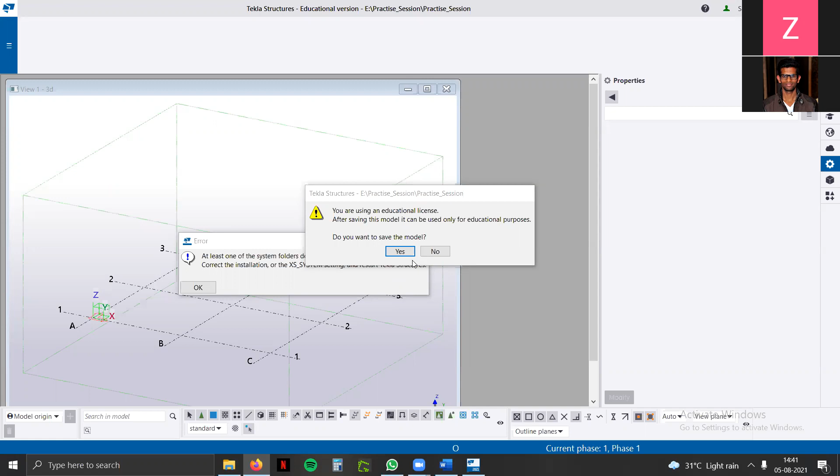I'll click yes to save this model, and I'll ignore this error for now. So we are into the software right now. It's popping up Trimble Connect - I'll talk about that later, what Trimble Connect is. So this is the interface of Tekla Structures, how it looks like.

We'll talk about the features and functions one by one with the software, starting from the file menu - the three lines icon represents the file menu. Here we generally provide input regarding setting up units, project properties, location of the project, and whichever information we want incorporated in our drawings. From 'New', once you've started with a model, if you don't want to open Tekla again and want to start a new model, you can directly press New to create a new model without opening it up again.

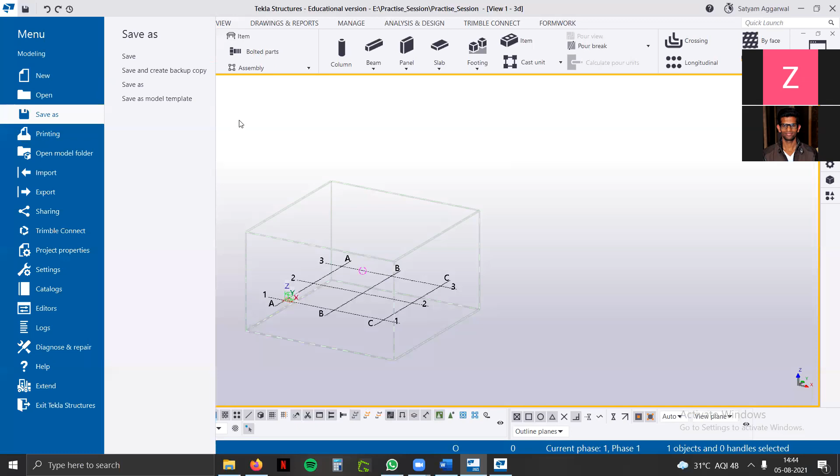Okay Satyam, just a second. There's a hand raised by Aftab, sir. Yes, sir, just hello. Yes, Aftab sir, yes.

Actually, I have downloaded this software which you gave the introduction to, Tekla Structures, but all these icons are not shown to me - in my software the icons are different from yours. Did you download the education version? Yes, I have downloaded the Tekla Structural Designer trial. Is it the same? No sir, actually I asked for Tekla Structures 2021, not the designer one, it is the modeling one.

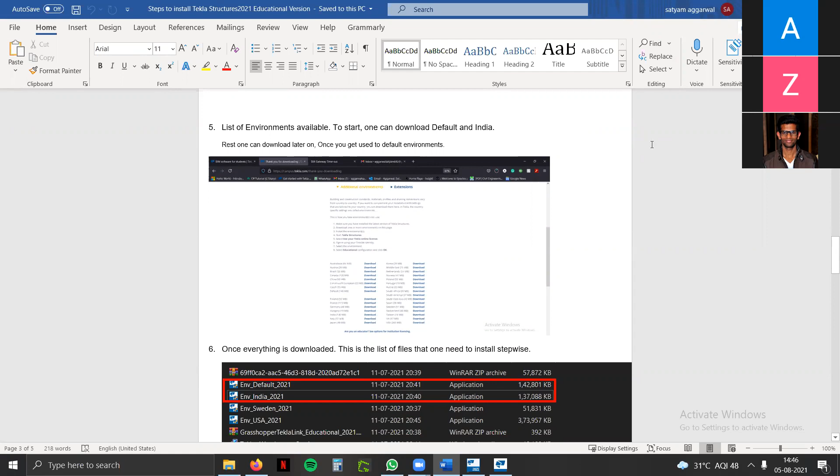Is there any option so I can be on the same screen as you are showing us? I think you have to download it again from the website - I have shared the steps as well. If you feel any issue, I can help you out, you can share your screen afterwards. So Tekla Structural Designer is another one, Tekla Structures is another one, and Tekla Tedds is another one - as discussed previously, Tekla has branches, and under that branch three softwares come: Tedds, Structural Designer, and Structures. We are having the session on Tekla Structures for now.

Satyam, what is the basic - there's a question that comes, sorry to interrupt you again. There's a question coming about what is the basic difference between the Structures and Structural Designer software, as you said there are three branches, so what is the difference between these two?

Hello, Satyam, am I audible? I think Satyam lost his connection. I think so ma'am, I'm just connected. Yes, I think he just left the meeting, I just had a word with him. I think there was some internet issue. Okay it's fine, can you just answer that and then we can proceed? Yeah, I'll answer, I'll share my screen and answer.

So you can see the interface, we have different tabs: steel, concrete, rebar, drawings and reports, manage, analysis, and design. In Tekla Structures, what we do is model the building according to its nature, whether it is a concrete or steel type building, and after that we extract the drawing or production-ready files which directly go to the shop drawing factory where they will be casted - it is compatible to that.

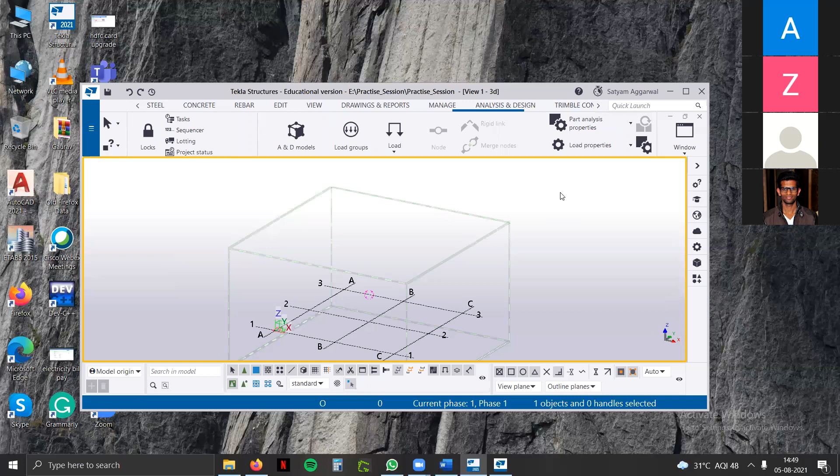Okay, I hope Satyam - yes yes, I think it's fine, you continue and then we'll see if we have any queries and take them up at the end of the session. Sure, okay.

So over here we have printing - we can print drawings and reports. Reports is for extracting what type of bars we have, the schedule for bars and everything. Print drawings lets us print the elevation plan and shop drawings from this command. You can see the interface, we can do the printer settings, either in file or PDF - we can directly make that model and convert that drawing to PDF format to send directly to the factory or to the contractor who wants to use it.

So we have different options as well, what type of nature we want to have for extraction, like document manager. Then we have the model folder, open model folder. So in starting, we have generated one folder for that model. So over here we have loaded the model folder.

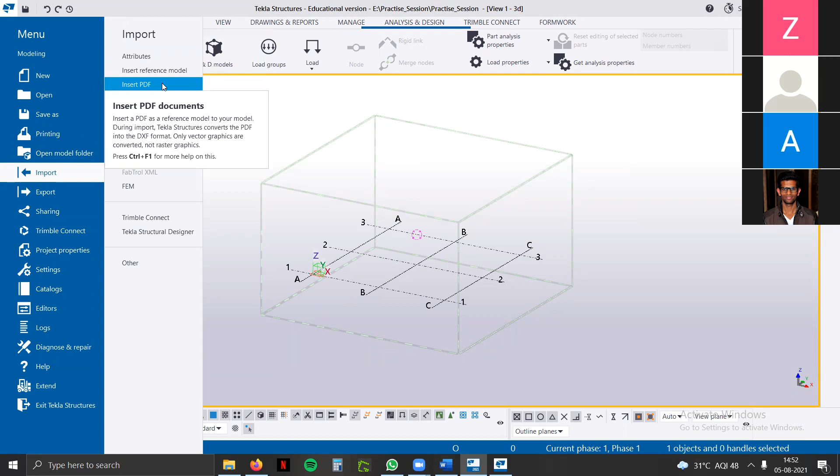Then we have types of files we can import. We generally use CAD models if you have, and DWG files and DXF files, whatever format we have, whether it is DWG or DXF, we used to import that. And if we have any PDF, we can directly insert that. We used to have insert reference model, like I have shown previously in my presentation. We have MEP model, how we coordinate is like reference model is a very good tool to add that. So we add from here, and we can see how it looks like.

Okay, and export IFC is a very good function. I have we have discussed about it. IFC, industry foundation class. So what basically IFC does, whatever we use to model in this area, this will be exported, and obviously we won't be sharing all of the model to the owner or contractor or whom the person is concerned. We will share in some simple format so that it can be visible to everyone. So IFC helps us to convert into a simpler format.

Like DWG and CAD is for drawings, like we can't share all of the software to the person. We need some specified file format to make it readable, human readable. So we'll use IFC for that, for the model.

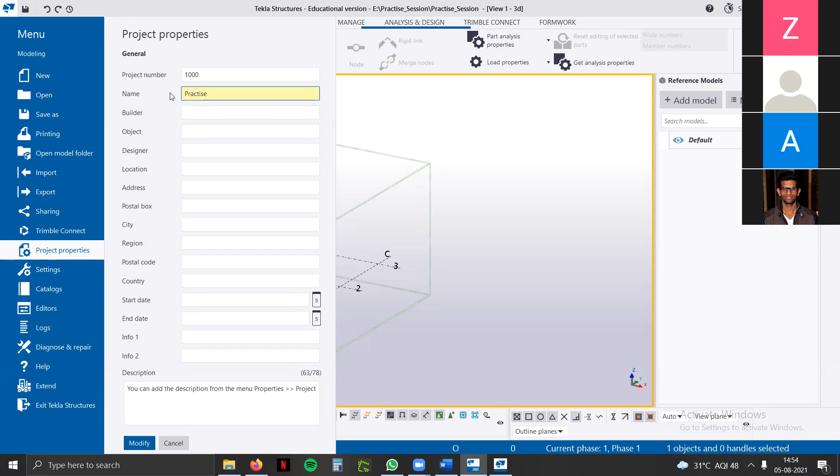As I was talking about project properties, while starting a project, we will assign some number like 1000. It is the name of the project. So I'll name it as practice builder. I'll leave it, object, region in which the project is located, city, whatever fields you have, whatever data you have, you can put it over here, and it will be directly helpful in generating the drawing.

If the designer wants some specific set of information in the drawing, what we use to send to the contractor, we can describe it over here what we have. And after filling all that important information, we need to have that location.

Like on the real-time coordinates, do we want to start that project, or can we start from origin axis? If we have northeast coordinates, like from total station, we generally have coordinates of the building, the specification of the building, where it is located. So we'll provide that northeast coordinates, elevation, latitude, longitude, all those dimensions. Otherwise, we can start from the origin 0,0 axis, skip that part and start from the origin axis. So these are the basic project properties we want to have, and we can start with that thing.

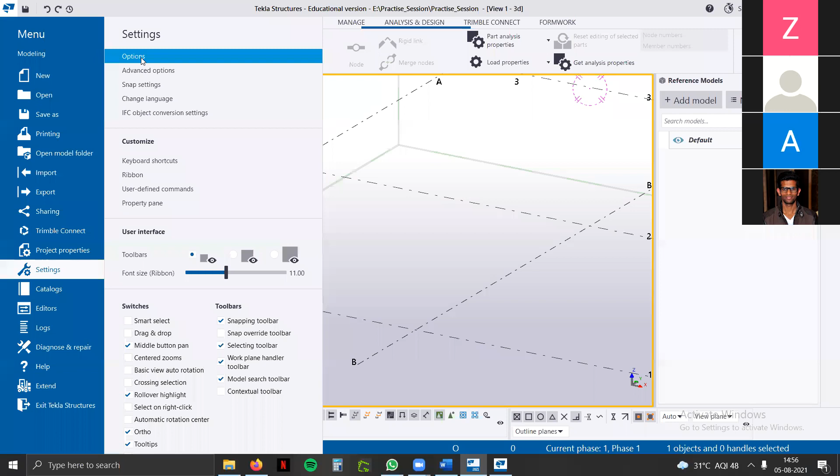Next is settings. If we want to modify something, let me show you an example. This area is called work area. The box you are seeing is a boundary of the area in which you will work. If the person needs to start modeling, they should have some boundaries, some specified area of work.

So this is called the work area of the model, and this is grid lines on which our drawings are based. We start modeling like where our footing will be, and whether it is eccentric to the grid, or on the center of the grid. So these we can all manipulate, we can make a change as per our drawing specification.

And as I have clicked upon this boundary box, we have different information like name. We can see it is a 3D model, so name is specified as 3D. Angle is mentioned as 3D. We can change if we want plane, 2D plane, or if we need 3D plane. We have projection, orthogonal or perspective.

Perspective is like it will diminish while going behind, and orthogonal will be the same from all around, keeping same. Obviously it won't be visible for now, I'll show when we start modeling, we can see the difference. And visibility depth, like how much height should be above it and how much below, that is there. So these are basically the default settings for now.

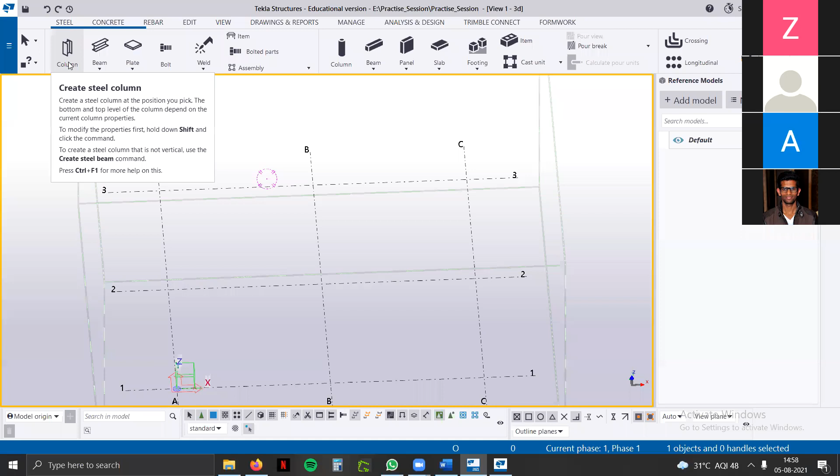In this ribbon area on the top, which we have by default, we have steel as an option. We can start with a steel column, beam, plates, bolts to connect them, or weld to connect the two steel parts, and items if we have specified items in the project. So this section covers steel.

Next is, if we have a concrete building, we need concrete elements to be there: concrete column, beam, wall, slab, and footing - we have everything. And item, if there is anything not specified, or we want a different concrete item which is not like the regular ones, we can put it in there.

Edit, if we want to see some changes, like if we want a cut in the beam, column, or slab, we use the fit part option. We generally use it in steel to fit it up. Chamfer - we generally see slabs made chamfered, we do that at the edges.

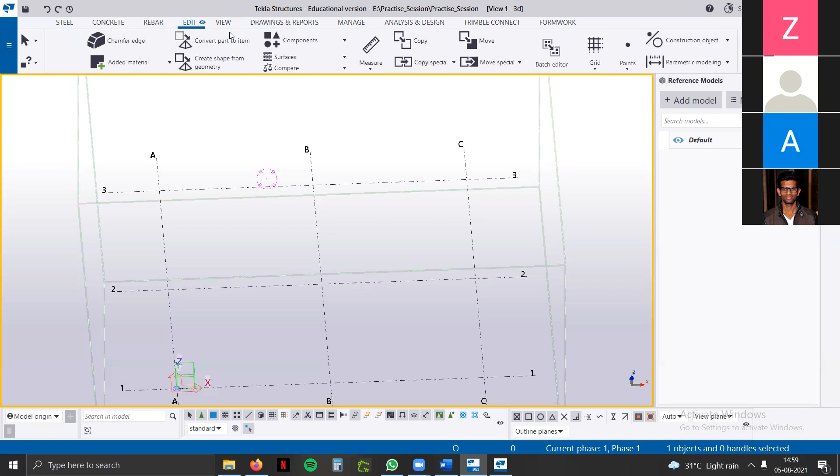After edit, I'll move towards measure. If we want to measure, say from one point to another point distance, we'll pick one point with the left click of the mouse and terminate it at another point. Then we can terminate it by clicking again on the left mouse button. So this is the measurement tool.

Copy - if you want to copy one object from one space to another, we have a different range of options for that. And move.

As I've talked to you about the work area, this covers the work area. This is the default view, but we can select and alter it as per our requirement. If we want to shorten it up, we use this option using 2 points. So we pick - like this, we can't see anything, because we have shortened it up.

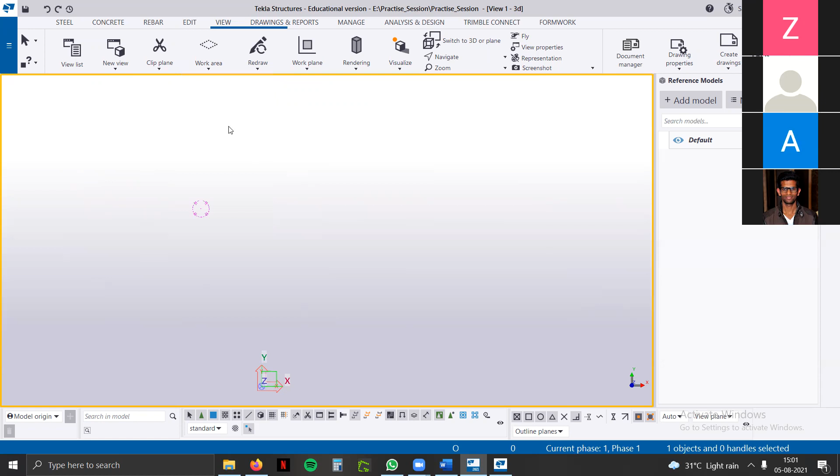But to bring it back again, we'll select this - we'll use this to fit the entire model in all views. So it will bring back the entire model in the window.

If we want to make it shorter, we just pick and drag to the location we want to see again. We have just a basic closer look of that. In this particular area, whenever we open a model, it will show only this amount of area - the elements attached to this view will be visible. So I'll bring it back to the full view because we need the entire model.

So these are the basic tools, the basic command list which are there. The ribbon is full of many commands. As we get used to with this software, we'll learn how to tackle all these commands. We'll try to cover these commands one by one.

So I will start modeling one footing. I'll pick up a footing. Before footing, we can see the grid, but after the work area, we will model that footing on the grid.

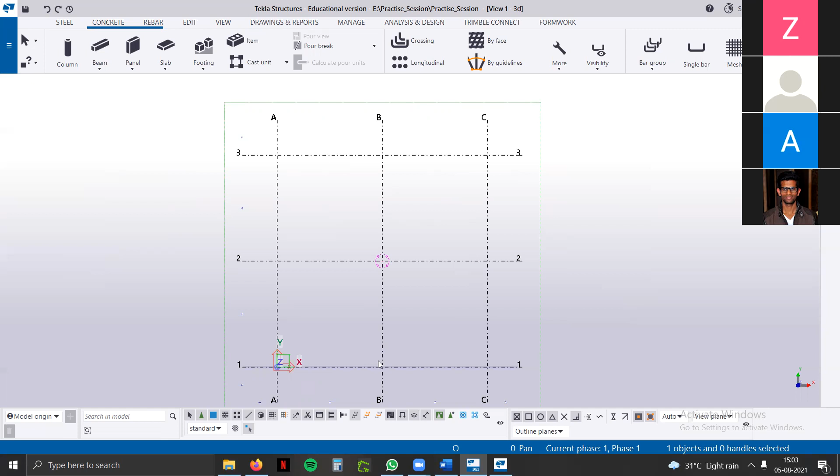Grid is a very important part in any project. The designer or the person will see how the geometry is and how they need to divide the building. So they will plan some grid system, a grid coordinate system in that project. After setting up that grid space, obviously this default grid won't be used.

We just press double click on that, and rectangular grid is an option available here. If we want a different type of grid, we can use that as well. We can simply go to the grid option in edit - we can create a radial grid, create a rectangular grid, or add a grid line if we want. So we'll be choosing the rectangular grid option for now - this is rectangular grid.

So if we double click, we have this rectangular grid option. Now we don't want this default grid to be there. If we want to modify it, how will we do it? So default is like if we measure 6,000 cross 6,000, but we want somewhere 3,000, somewhere 4,500, somewhere 5,500.

We'll pick up this grid. Firstly, origin is 0,0. So we have 0, and after entering another coordinate, we have to provide a space over there so that it picks up another coordinate. Without space, it won't pick up another value. So it works accordingly, like a tab or space, you can say.

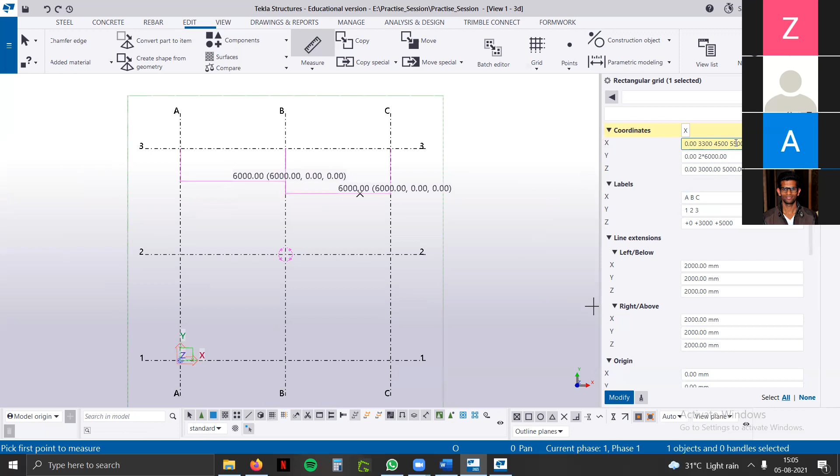So to add another dimension, we'll set it up on 3,300, and another I'll pick it on 4,500. Just providing the space to separate it, and 5,500. So you can see I have taken up 1, 2, 3, and 4 grid lines. Over there are 3, so now you can see the difference.

So we have 4 grid lines over there. We have made a change over there. On origin, we have A grid. Then on 3,300, we can relate it to B, because labels are also mentioned over here. These are the default labels. We can alter it, like we have made a change in the coordinates. So over B, and then third coordinate is C, and then we have another grid line which is not labeled.

We are seeing just a blank, we are not seeing any label on that. We have to name it. So we have added one grid line, we'll make it D. So we have 4 grid lines over there.

So it works on the axis. We are on the plane right now. There are three axes in the software: x-axis, y-axis, and z-axis, which is out of the plane. That helps us create levels of the building, the z-axis.

So we have made a change in the x-axis coordinate, like these are the vertical grid lines. So along the grid axis, they have made a change. So on the y-axis, we have three grid lines again, which are on the default side, at 6,000, 6,000 each. So we'll make a change over there again.

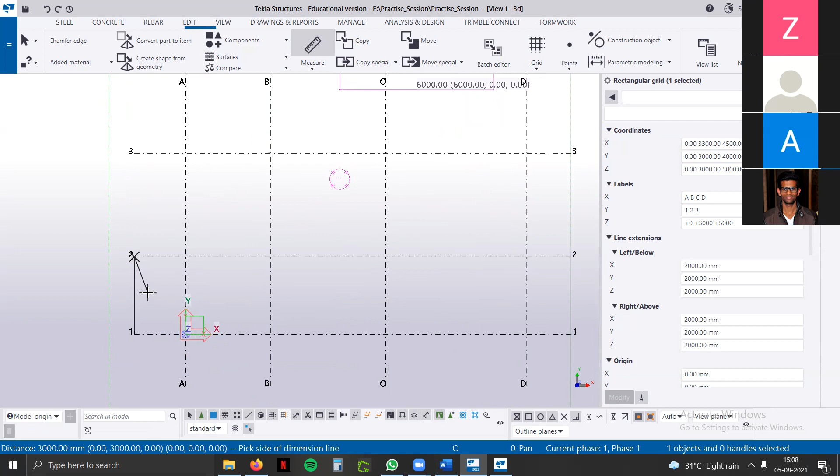So let us check whether the dimension we have provided is correct or not. Again, from the measure tool, you can pick it up, endpoint 1, endpoint 2, and then anywhere in the space you can press the left click of the mouse: 3,000. Again we can check by measuring it: 4,000, and again this.

So as you can see, we have made a change, and this is parallelly displaying the results. That is the power of this software and BIM. We need not change anything in any drawing—since we have not made any drawing—but it will be parallelly reflected to the drawing as well, and we'll label it up also.

So we are seeing a coordinate grid system over there, a rectangular grid system. Now we have talked about x and y axis. What if we want to add planes in that? We want to have different sets of levels, because a building will obviously have some stories, multi-story, whether it is G plus 1, 2, 3, any of it. If there is a basement, we also provide it. So I'll talk about ground and plus 2, 3 coordinates.

So we'll add some planes over there. I'll take the height of the building as 3,000 first, and over there—yeah, I missed that thing. So in the coordinates, I need to make a change, not in the labels first, so that I can see 9,000. So on the zero axis, that is the ground floor; we consider the first, second, and third floor. Accordingly, we can make a change over there: 6,000, 9,000.

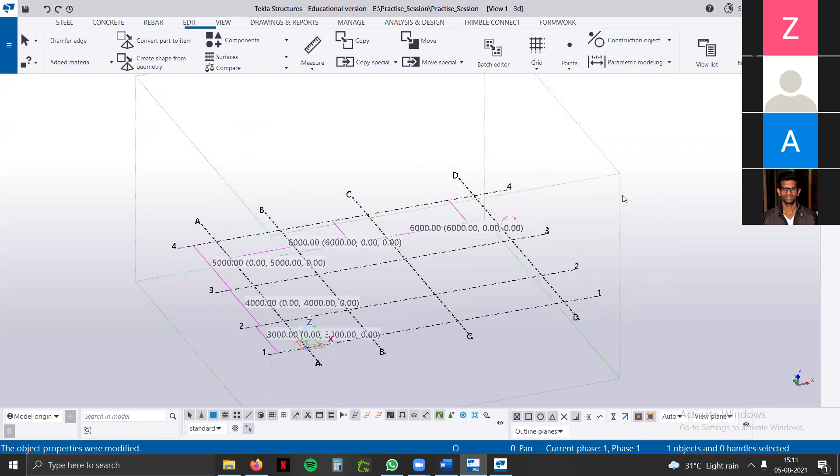So will we create... Hello. Yes, yes, Satyam, continue.

Yes, it has some great feature like in the view as well. We can create views along the grid lines. So in this tab, we can see from where, which location of the plane we want to have coordinates, we want to have views.

Like we have seen in the presentation, we generate a model and we can see the view from everywhere of the building. So this is setting it up, doing the settings and some tweaks before entering into the modeling. So X, Y, Z, XZ, which part of the grid system or coordinates we want to see, which axis you want to see.

And if there is a radial grid, we can do that changes. Since we have rectangular grid for now, we'll use this and create. So previously it was empty, now we have got a list of views over there. Now it is bit relatable, like whatever grid we have created, we have got the views for that. We'll look into it like how it is there.

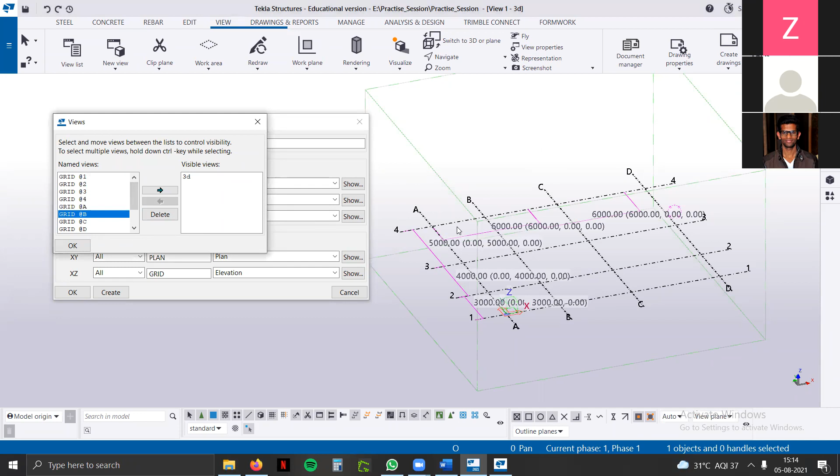So let us pick a view over here, there from we can check. I'll take inside of the grid a view. So we have created levels 0, 3000, 6000, 9000 - ground floor, first floor, second floor, and third floor. So there we can check, we have levels, we have proper levels, we have what we did in the grid system.

If we want to measure it, it is being automatically shown by this parametric direct modification tool. So we have that grid system over there. There are many more features as well, but for basic, we'll keep it this way. And origin, if you want to shift your grid from a certain location, like from coordinates, you can put it over there, or you can specify while starting a project, provide the base coordinates. Accordingly, you can start your grid.

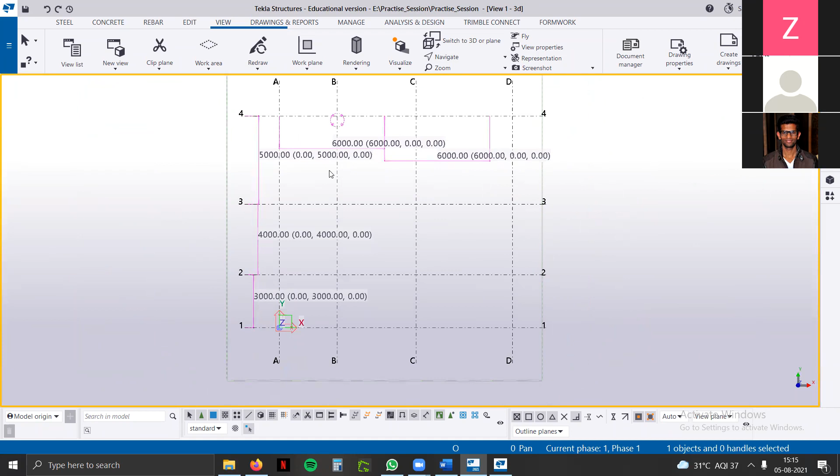Now we'll move back to 3D and we'll see the grid system. So now you must be wondering why all these dimensions are visible, and will they be appearing in the drawings? What will we create? The plans, will they be along the drawings?

No, we can just right click. We have different options - move entire, fit to entire model. If your model area is big, you can pick fit to work area, and this work area will increase, and we'll press redraw for it, and everything will go away because these are the temporary dimensions, not the fixed ones.

Okay, now we have made our grid system. So we'll start the model, like about from the concrete, we'll pick up any footing. In the footing, first I'll talk about what type of concrete element is present, standard. In the concrete, we have seen column, beam, but there are further classifications as well. Like there's a single 2-point beam, poly beam for different shape of the beam, spiral if there is any curve in the beam. So we use spiral beam.

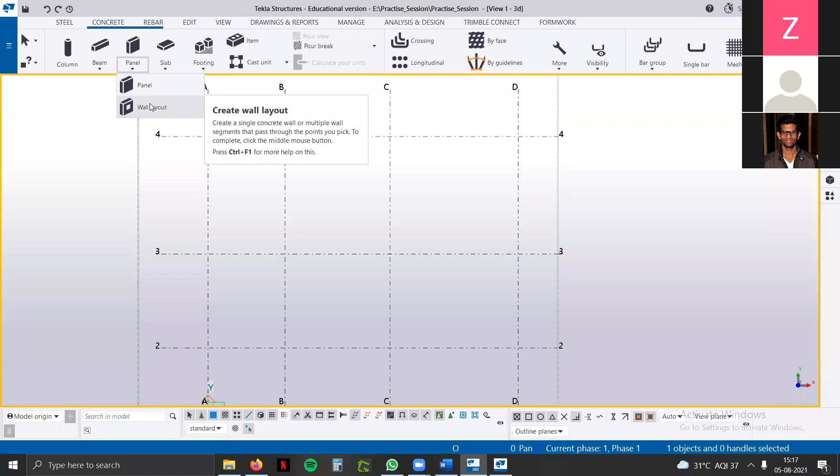Panel, wall panel, what type of panel it is. Layout, if you want to continue modeling more walls, one in a single click, you can use wall layout. Slab, what type of slab it is, floor layout. If there is a plan, we can start and directly use it as footing, what type of footing it is, pad footing or strip footing. So I'll start with a normal pad footing.

So you must be saying like it is clicking or picking up these endpoint, midpoint, point of intersection. That's why it is panning to those coordinates. So we have this toolbar called the snap toolbar, because it is snapping to midpoint, endpoint, and intersection. So we have to use this snap toolbar to adjust it. I have made it turned on - snap to points and grid intersection, that's why it is panning to point, intersection, endpoint.

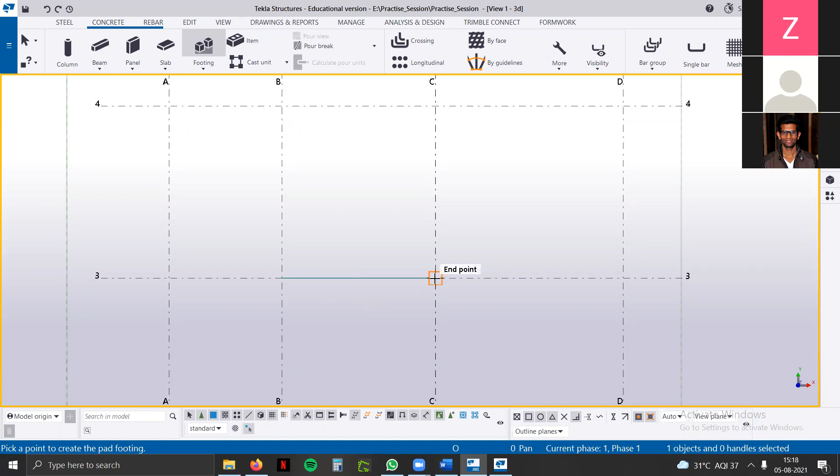If I turn it off, it won't be picking up a pan to a grid point or intersection. It just regularly picks up an endpoint. So snap to intersection point, I had turned off, so it will just pick to midpoint. It won't show the intersection, whereas earlier it was showing intersection. Okay, so I'll choose pad footing on the center of this area.

So on this area we have pad footing done, and this is like a default size. I hadn't given any size to the pad footing. I just clicked it and modeled it, because Tekla has some basic default settings, so it picks that up.

And you have to alter that as per your requirement. So we have a toolbar for that, to adjust that we have settings for pad footing. So we have name, we can specify whether it is F1, F2, F3. So I'll just name it as F1.

So for profile we have 1500 cross 1500, meaning the length and the width. 1500 cross 1500 - if it's not symmetrical, we'll make a change. We'll have 1200. So you can see from the center it has been reduced, so now it is 1200. Width has been changed, so it is width cross length of this wall, length of this footing.

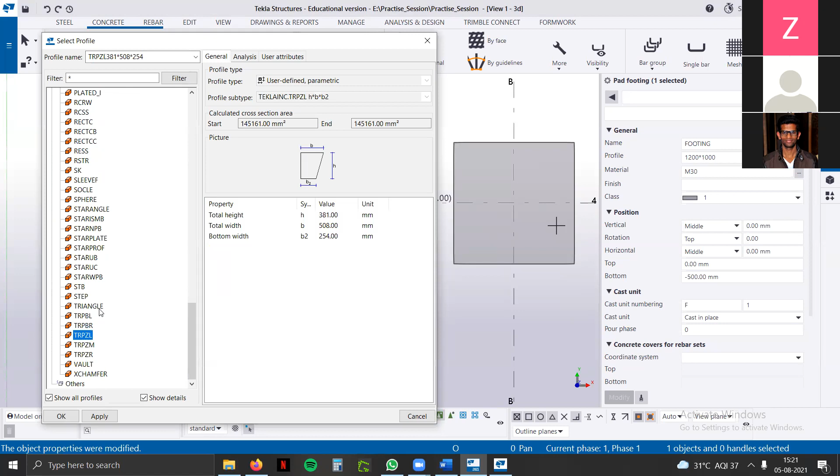And we can see there's a color provided to it. It's very much your choice, you can assign colors on your choice. Or a senior person can advise you on what color of model you want to have, how you can specify elements with the help of colors. So we can specify that, and that comes under class.

So I have given this green color to this, and I'll change the color of this as well because I want to specify it differently. I hadn't made the change, that's why it is not visible - I pressed it but didn't modify. So it won't change without modifying. So now it is changed.

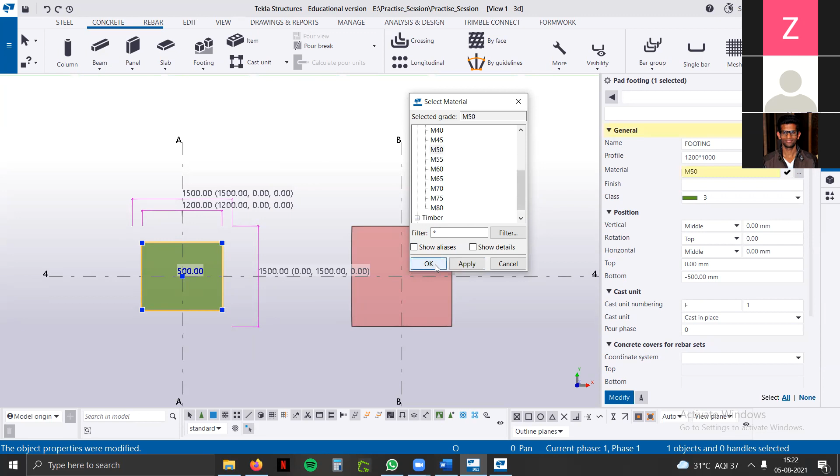So we had talked about color, profile, then comes the material - that is the important part, like which grade of footing you want. As per Indian standards, since I chose the Indian profile in the beginning, I'll be getting Indian standards, Indian codes. So there's grades M10, M15, M25. For normal construction we use M25, M30, but for the footing we'll use M50.

So that we have assigned to this material. Finish, we leave it for now. And then comes the position, rotation, horizontal, top and bottom, how this will be. So I'll switch off direct modification because it won't be displaying the start and end points.

We hadn't talked about how this works, like how this is a one click option, but if we have to create from one point to another point - so this software works upon these two points, this yellow and magenta one. So for any element, if you have to begin modeling, you start from this one and terminate it at this one. Yellow is considered the start point and magenta is considered the end point of this model, of this element.

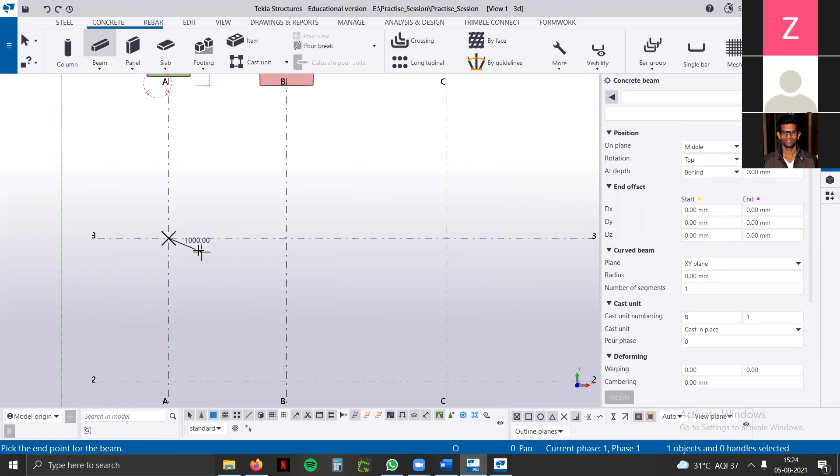So for footing we've seen it is one click, but if we want to have a beam of a certain length, this is a start point which I am giving, point or intersection it is demanding. So it automatically gives instruction when you start modeling as well - pick on the bottom, you can see, pick the end point of the beam. So you see the beam was created, pick the start point for another beam to start creating, press escape.

Now I have finished modeling the beam. I don't want another beam to be modeled, so it is still in beam mode - you can see it is already selected. So if I want a beam connected from midpoint to this point, it will still create a beam, it won't have any other element. So I just press escape to switch to another element, or else I can directly press to the other element to model it. But if we don't have any other element to model, we just press escape.

Okay, so we have footing over there. We have the start and end point.

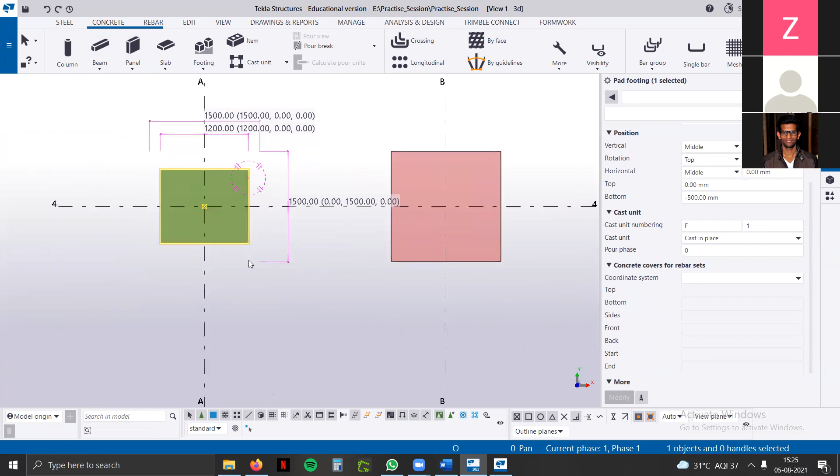We have seen this position, like vertical and rotation on the top. Vertical is middle. If I change it to down, it will change in the Y direction - vertical is for this element, this direction. So it has moved from middle to down, making the footing eccentric, not on the center of the grid. Instead of moving this footing from this place to make a certain move, you can directly choose this.

The rotation, it is on the top. You can make it front, how it will appear. So it has rotated. If I move back to top, we've made a change this way - front, so it has moved this. I'll keep it back to top.

Horizontal is like in this X direction. So in the X direction, it is still in the middle. I want it to be in the corner, so I'll move it to the right. So it has made some shift to the right. If I make it to the left, so it totally moves to the left.

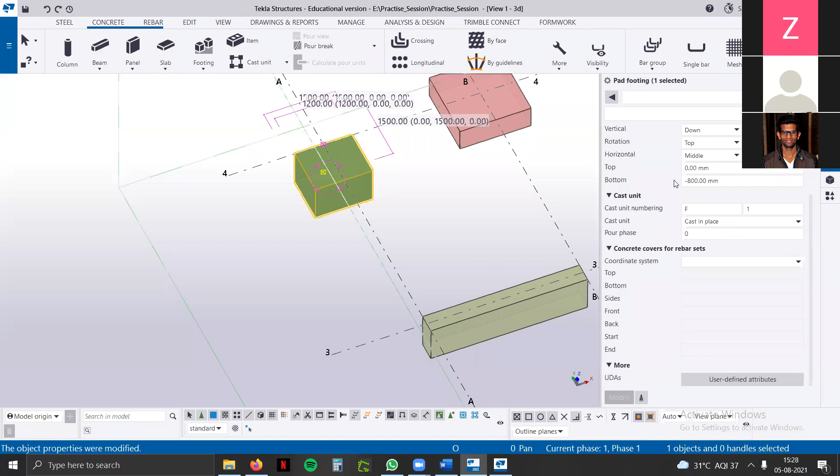Obviously we have assigned the footing, and we have made a change over that. Now this cast unit numbering - cast unit, once we start working within the model, we can talk about the numbering, cast unit and pour phase. We can leave it for now, this thing. Basically we can focus on these modelings of the geometry.

These are related - once we enter into the drawing phase, we have to number it accordingly, based on the nature of the building, whether it is cast in place or precast. So we decide accordingly. For phase, we keep it 0 for now. So that is for the footing. We are just talking about the geometry modeling for now, how the geometry modeling works.

Now we have modeled one beam from one point to another point. Whether the beam will work the same as the footing, we'll see the interface of the beam as well. So it already displays concrete beam, but we have selected it, so it has opened up its properties - what type of beam we want. Its name is by default, it is beam profile 800 cross 400.

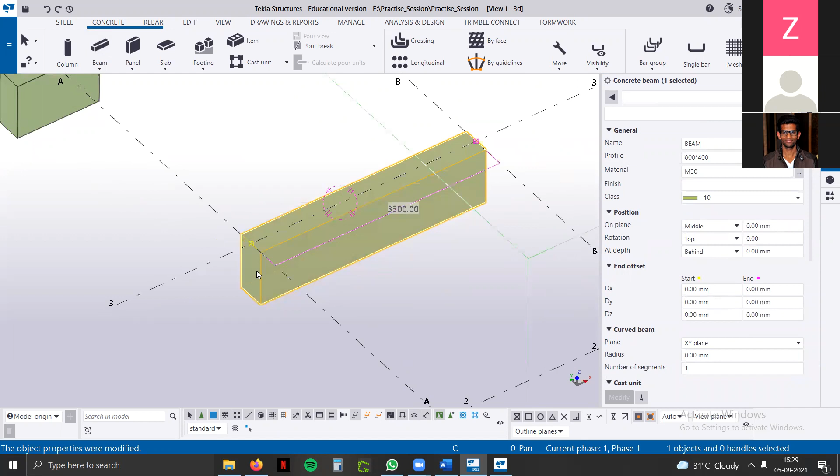So what is 800 cross 400? What does it actually mean? 800 works like depth cross width of the beam - so depth cross width. If I change it to 600, and if I make it 300, it will make a change. Whatever depth and width we want, we can alter accordingly.

Material we have seen - class, if I want to make it apart from this thing, we can change the class. Then position - what we want: middle, top, behind - we have seen in the footing. You can see it here as well.

It has made it to the right. I'll make you see from the top. Position on plane, because we are seeing on the plane - so in this part, it has made it on the right, on the left, because along this direction where it is making a change, along right or left.

I'll keep it back to the middle. Rotation from where it wants - front, so it will flip. So now depth has become width.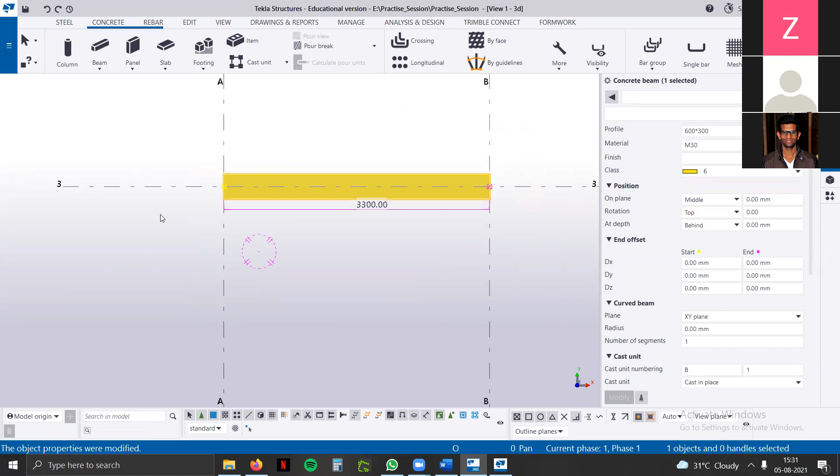Now again depth and width back on track. So depth, it will be behind, middle. We have the option front - if I choose front, let's see how it will be. So from front, it has been put on the top.

Behind, it will straight away take the bottom. I'll keep it back to the middle. So however you want to set the modeling, you can alter that accordingly. You can obviously add dimensions to it, at the depth you want, say 100 millimeters. By default it will show you that value, and you can copy and paste it all across. From the grid, at this distance, it will show like that from the middle.

Now, I didn't talk about the end offsets. How do they behave? I talked about start and end position, but not end offset, like in the direction X, in the direction Y, and in the direction Z. So I'll bring it back to normal, so it is in the middle.

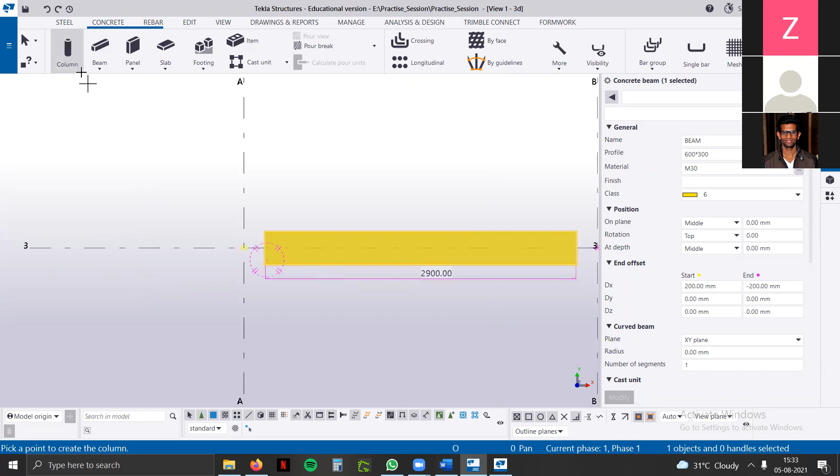That's how, like if you have a column over here, let us consider a column, you'll give some distance to it, and it automatically adjusts. I'll modify it, just copy the property of it and model one beam. So I don't have to mark another beam separately. I just copy the properties, and similarly I can use the beam all across my grid. So one needs to set the property once, like this is one type of beam, I need this much distance from the edges, and use it wherever required.

So what is the DY and DZ? If you want to choose some width, you can alter it this way. So I choose like 50mm, and it is shifted 50mm. You can see there's a slight turn over there. And if I want to make it more slanted to this side, I can make it 50 the other way, so it is twisted like this. If I want to align this way and don't want to have much width this way, we generally have it at the center of a column, so I move it back.

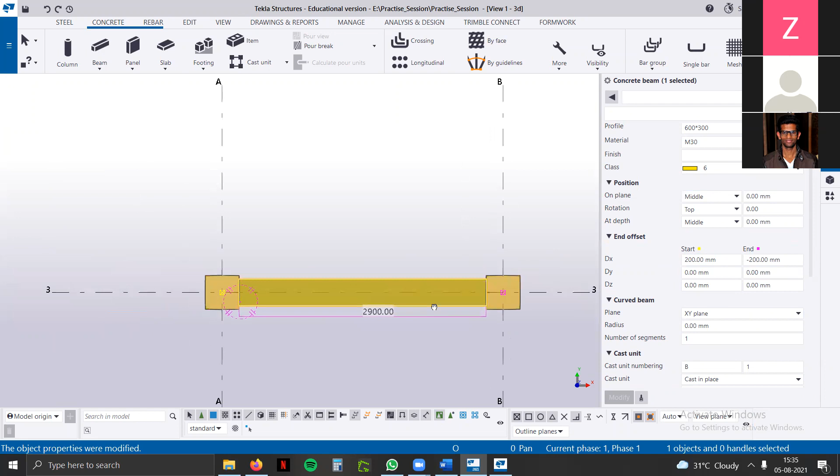Similarly, within the Z direction, if you want to increase or add some height from a standard coordinate, so we will make a default structure with a footing, column, and beam. We use footing - one is centric, one will be at the center, I must consider. Middle I'll choose, so it will be in the middle, and will be symmetrical footing.

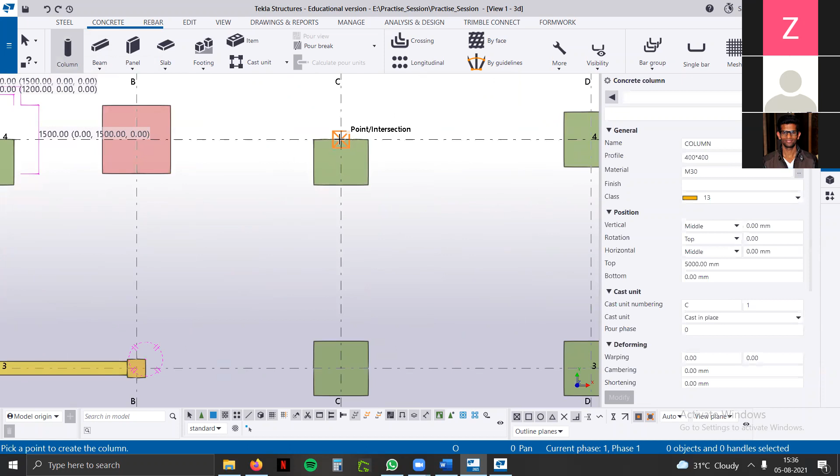In this way, I'll delete this beam and make a footing instead. But if I need to start a column with that as well, because it is in the bottom footing, now I need to start with the column again. I'll take the point of intersection at that place, and I want to align this column to the footing. Either I can choose to move it, or I can choose to have it down, because it will make it offset from the center to the downwards direction.

Then I will adjust the height of the column. What will be the height of the column? What will be the width? So if it is 1200 by 1100, I'll modify it. I will take it as 500 cross 600, V cross H. So yes, you can see the difference, we had made a change over there.

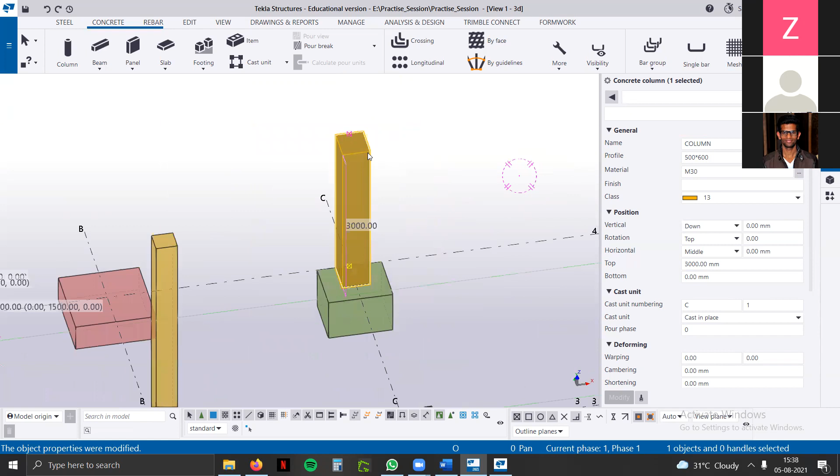For material, I'm taking M30 now. And for height, I don't want a height of 5000 because that is the basic default height for Tekla. So I'll have a height of 3000. Then we will copy this column to another grid.

So we have this in the edit function, where we'll move, copy, edit—what we have seen is copy special. So linear, in one plane, at a specified distance, we can copy in the XYZ direction.

Mirror—we can copy plus mirror to add a mirror to it. Like we want this column, and we can mirror it to another place.

We can use that if we want to switch, flip, or rotate any object—don't need to have it in this direction, we want to rotate, we can use this command. Another object: if any item is connected with this thing and we want it some other way, we have to connect it another way. So for another object, we can use this option.

So these are some other commands we want to use, like from another model. If we have created some object in one model, that type of object, and we want it in this model, we can copy that.

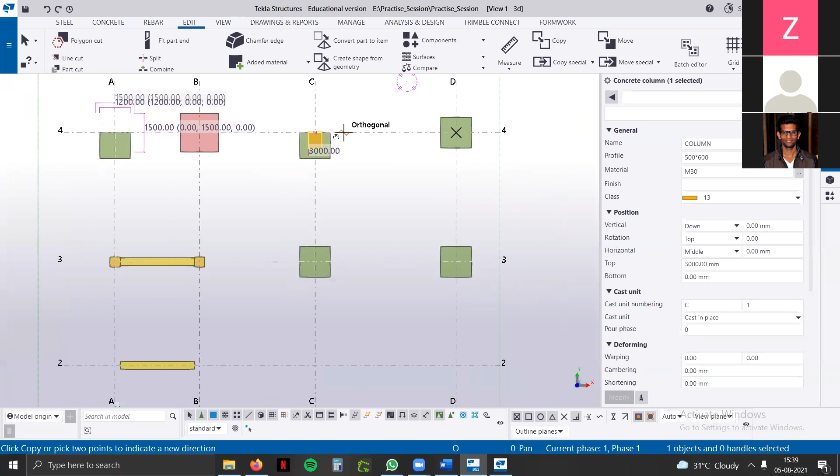And what if we have this model to be copied in all other footings—copy to another object, this is what I'm talking about. I'll just press this, it will take up its original location, and we can mark it up, this and this.

So we have the column, but it is not as per our requirement. So we just take and middle, we can alter it. It is not in the middle of this, so we have to make some alteration changes.

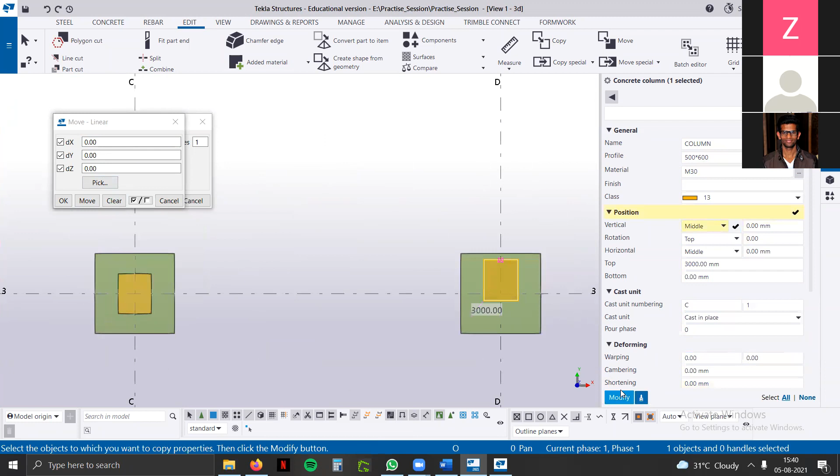Same way we can move it—we don't have to make it again and again. We can just double click it, copy its property, select it, and modify it. For moving it, we can directly use move special.

Or at the last, we can simply copy and pick a copy point to this and this way. So this is how we have connected our column and footing.

But if we want to add a beam over there, how would the beam's nature be? So lastly, I have selected this beam and used this property. That's why what Tekla does is it stores the last configuration of an element, so when we make a change, it will pick up the last property.

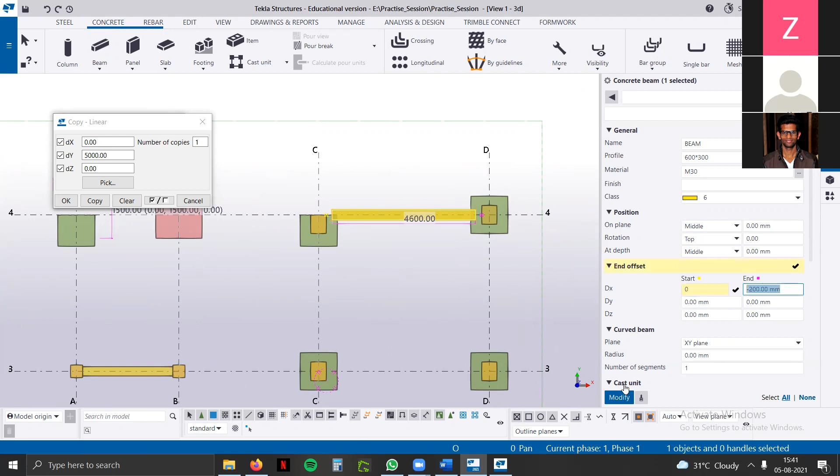Over there, we need to delete those dimensions as well, because we want them connected end to end. Since it is modeling, we are using the 3D plane, that's why it is coming at the bottom. But we can alter it and make it go to the top.

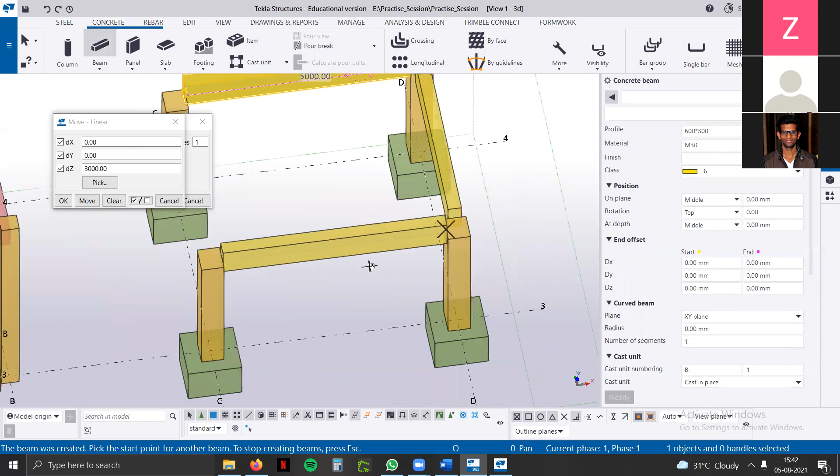And then we can connect this beam, and in the periphery we can connect the beams. Snap is working very well in this—it is helping to connect from one part to another part. So we can see a frame structure, like column, footing, column, beam over there. They are all connected with that.

So we want the column to be terminated at the bottom of the beam. So what will we do? We will reduce the height of the column by a certain amount—we'll measure the beam depth and how much we need to reduce. Since we have a depth of 600, we'll reduce by 300 millimeters. So for lowering it, we need a column height of 2700 millimeters—we need to decrease the height to 2700 millimeters.

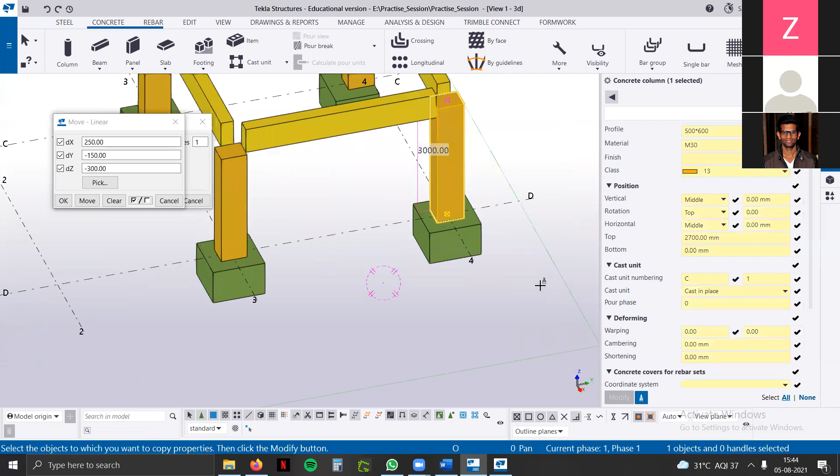And same with all other columns—I'll just copy these properties and modify. Or else I can copy all of these columns at once and paste it with a single click.

And I want the beam to be at the center of the column. So instead of it being off-center, we can change it to the center of the column—minus 200 and 200. Same with this way—minus 200. Here it is increased, and 200.

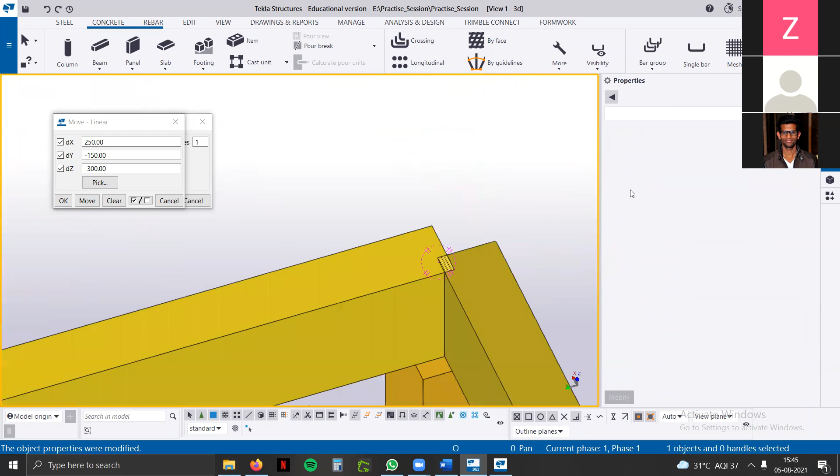So it is creating a clash over there, so we need to change that as well. The clash we have seen—overlapping is there, so it won't adjust itself. So we have to make some change over there.

If it is not fitting properly, we'll shift the beam backwards. For now, 50 mm is clashing, so I'll increase by 150. Over there, I'll see the space—how much it is. I have 100 of space, so I'll increase by 100 millimeters. And over there, I'll increase by minus 200.

Since I'm not finding a very good fit, I'll adjust this as well—I'll make it to the middle, and the column as well, make it to the middle. And now for the beam, I'll move this endpoint to the middle.

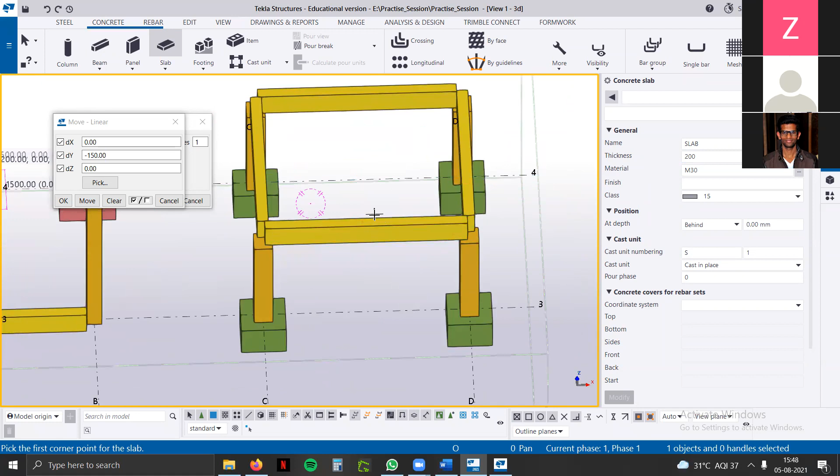We can see all these dimensions are being used, and if anyone wants to have feet inches, many architects use dimensions in feet inches, we can use that as well. We can convert the units to feet inches by going into settings and options, where we have modeling dimension, units and decimals. There we can simply select feet inches, and all that thickness and everything will be converted to feet inches. For the catalogs as well, we need to change it to feet inches so that we have compatibility between modeling and using the catalogs.

So we were on the slab, but how will the slab be modeled in this area. For modeling a slab, we need to use a point toolbar.

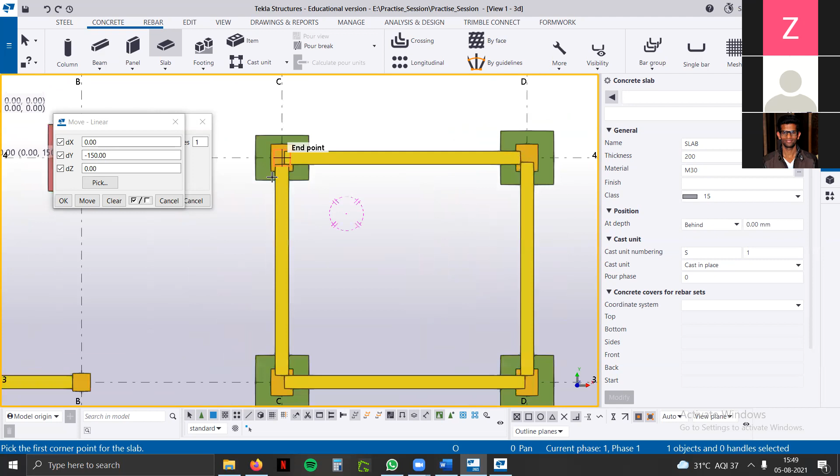It will go from one point to another point, and whatever shape you want to have, you need to have a minimum of three corner points for the slab. You can go beyond that if you want to change the geometry or have cuts, you can model it that way. But I am having some simple geometry, so I will take four corner points. One is that.

And terminate it to the point where I have begun. Since I'm modeling it in 3D, it's going beyond, but we can move it upwards. We'll give some height, and now we have this slab.

So slab and beams are flush for now, they are on the same level. I've kept it that way.

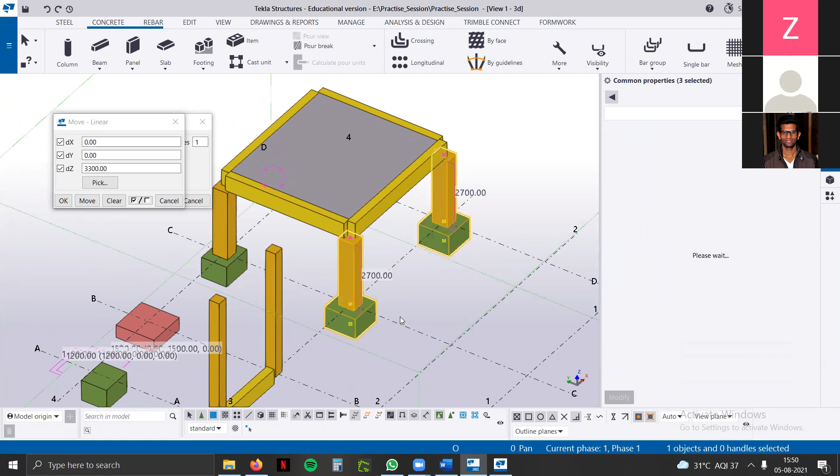So similarly, if you want to have more columns and more footings in this way, you can simply click this. Click these two options and use the copy function, measure the distance, pick this distance, copy, and again from here to here you can copy to extend the structure that way.

Like if you want to have a beam from here to here, you can copy. I might have given the wrong distances, that's why the beam is not there, or the grid is not equidistant, and that's why it's overlapping. So we need to make some alteration for that.

And over there, points are on the grid, but we have given some offset distance from the start and end point. That's why it's not exactly there, because we want to avoid clashes. So that's why it's visible there. I will make some change that way.

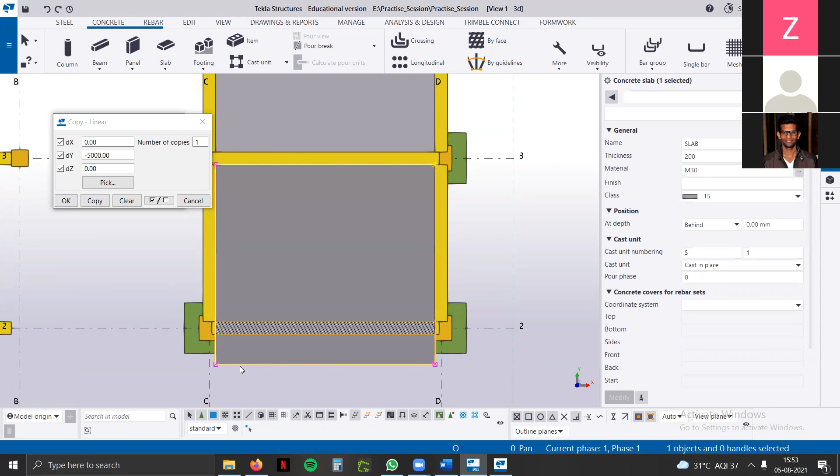So how we can create the geometry of a model. These columns I have used rectangular, but we can have circular as well. It's depending upon what type of shape you want, so we can use that way.

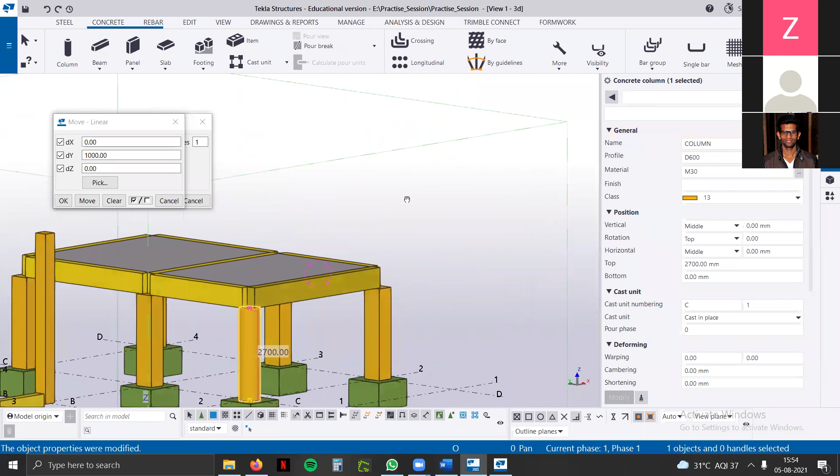Okay, so if you want to use this as a single item, like column and footing, instead of copying each element one by one, we can make it a single unit. We have the option 'create a cast unit.' It will give instructions on which objects you want to include into the cast unit to create it. It depends whether you want to add the column into the footing or the footing into the column, totally upon your choice. So I'll pick the footing, and along with that I'll pick the column, and create a cast unit.

So I'll pick this one and this one. I've picked the footing and then added the column into that. I'll press the middle button of the mouse, so now it is a single unit.

It is like an assembly. Over this, you can see these are the individual ones, these are not single, these are column and footing. But if I go into the object component over there, I can copy it as a whole.

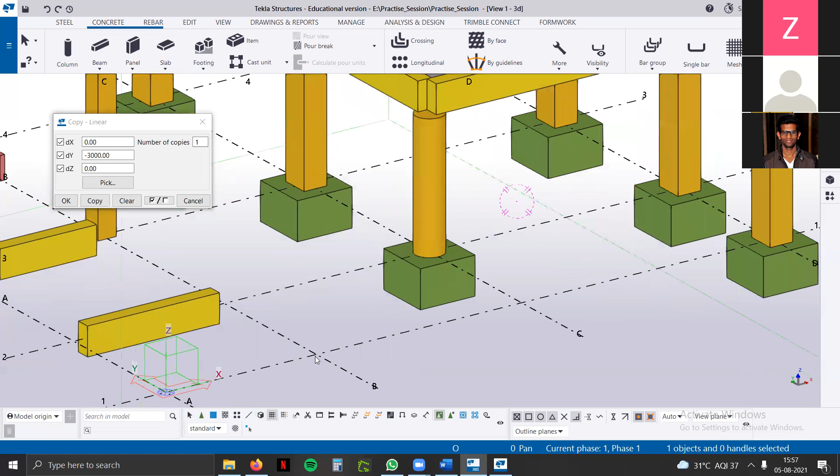We have another toolbar, select parts. If there is any other parts, we have points. If we have different points over there, construction lines, sometimes we used to have reference lines as well. With the help of this, we can select a reference line. This is the select model reference symbol. If we have reference model, we can use this and select grid. If I enable this, then I can select this. If I turn it off, like if I select the select model, you can't choose to have grid.

So this allows one thing to be selected at a time. If I press this, I can choose many of the things parallelly. So I'm not able to select the grid because I had turned it off. But what if I've selected all and select the grid? You can select that.

Similarly for the welds, since we had not modeled any weld, we won't be seeing any weld. Cuts and edit material, select views, bolt groups, rebar - if there are rebars, we can select the rebar. Loads - so we don't require the pour breaks and loads for a while, so I'm not suggesting you this thing.

And these are the select component. So everything, this ribbon is full of this component. Like column itself is a component, and assembly, I can say, like it which has certain set of information, that is a component. Like the column, it is a component.

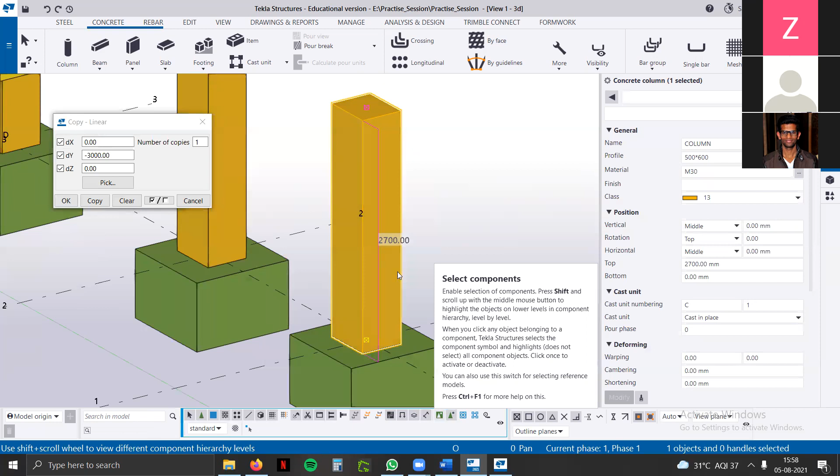And objects in component - so what if I have attached a rebar, and if it is not attached to the column itself, I have modeled it, but it is not attached to the column, it will be different parts. So if I have modeled the rebar, I'll show you.

Let us use column component. So this is another component, application and component.

These are individual. Since I select objects in component, I had to select one bar. So I had to use this option because I had added another part in it, like another component used in this particular concrete element.

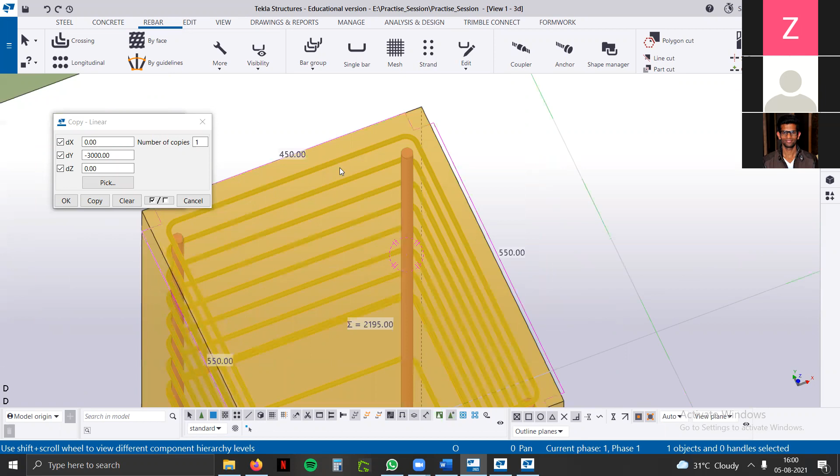So itself, like it's acting a whole component. So if I choose ring in the component, I'll use that part. If I had to select whole of the thing, like footing and all, so I hadn't made the footing reinforcement, it is showing automatically. So we had to alter this as well.

So wholesome, it is showing the reinforcement, reinforcement for the footing, for the column, in the assembly. So it has been turned down to a one single unit assembly.

So if we want to have like rebar, if we take a look about the rebar for the column, like basic rebar modeling, we have two options. Either go to the rebar and make one by one rebar in it, model rebar in it, or else we can shorten up our work and use directly column applications and reinforcement. Some might be available, some can be made.

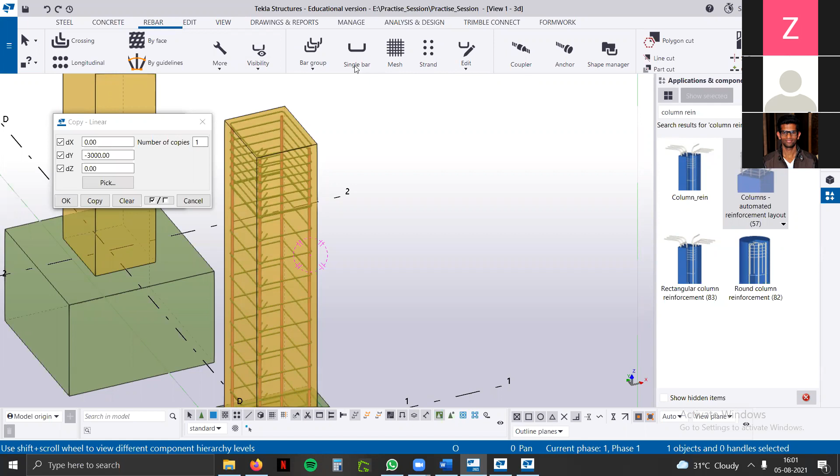So that will, if the process is repeated, we can make components - that is on the later and advanced stage, how to make an application and components. But by the default, we can use this bar group to model. So I'll pick up a column in which we can model to see how the rebars look like.

So since I have made some geometry, I want to be modeling rebar in it, we need to have separate view of that particular part. I made like, I'll pick this part, select assembly, so that whole of the area shouldn't get into the another view.

Create view and 3D view. So I want to make it separate. So I just created the one 3D view for the component for this particular column.

So now what type of bar will be in the column? We have seen general reinforcement layout, like vertical bars we have, and then we have the rings around it. So we'll take that bar group.

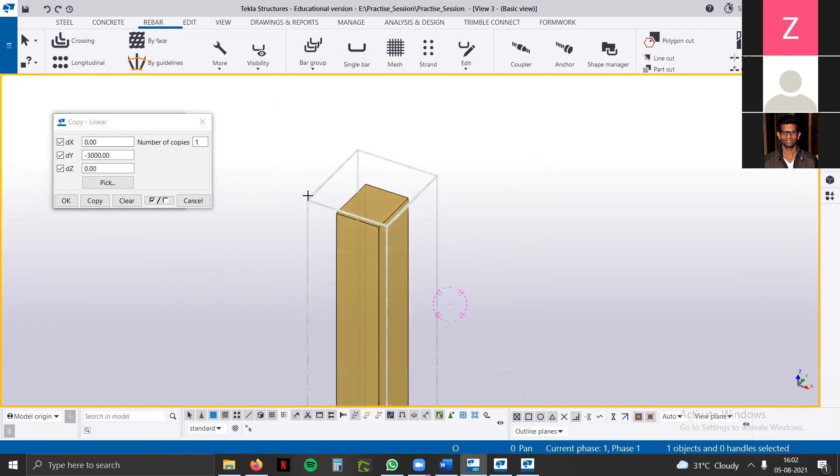So pick the shape of the bar, what type of bars we require to have it. We'll take from bottom to top. So I have given the shape of the bar like it should be straight bar. And then from the middle button of the mouse, I'll press terminate and indicate the reinforcement.

So suppose if this column has 4 bars around the corners, so the range should be either on this way to this, from this way to this way, or this way to this way. So I'll pick up the longer range first. On pressing the from range, giving it to the range, it has displayed some bars.

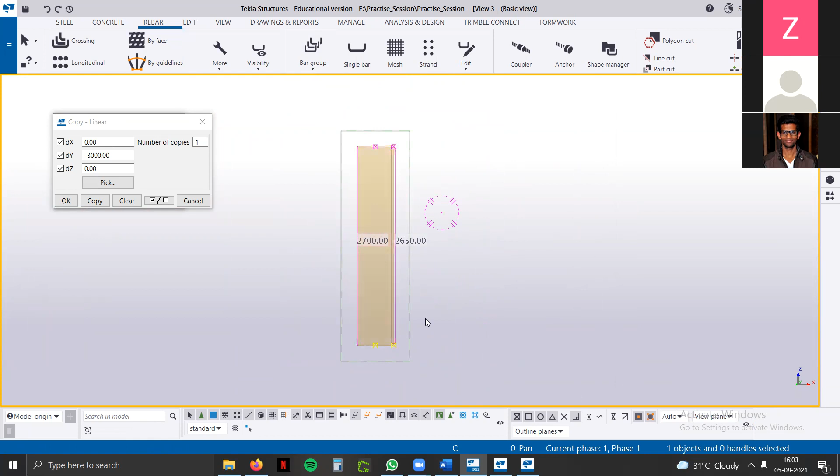And these amount of bars we don't require on this longer side of the column. So I'll switch. This is the snap plane. So view is like a view plane, like front view of any this particular area. If I consider it as work plane, it will change like from where I can work - like on the plan I need to work. So it will switch it back.

So I'll alter it. We have seen the grade we can change. FE500D, we generally consider it. And size is 10. On the corners, I require to have like 16 dia bars.

I can change it, the bending radius. As per the default settings, as per the default IS codes, it has bending radius and the list of properties attached to the bar. So I can modify it, I can make furthermore changes. I want 25, I can make it 25. But I don't want that number of bars, I want to make it reduce. I want such bars at the corner.

So I'll be using, there's a distribution method over there, equal distribution of bars and equal distribution by target spacing value. You can provide the spacing value, exact spacing, like at which end you want, number of bars across the spacing. There are different options you can choose to work with. I'll choose exact spacing, so I'll calculate how much distance I want.

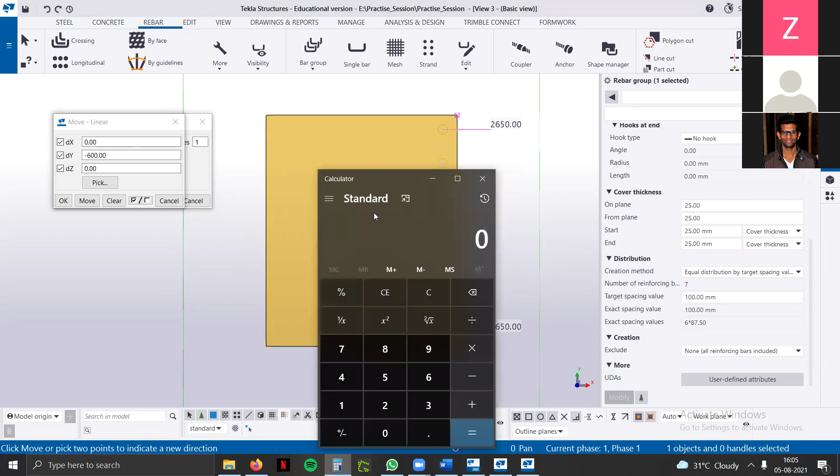600 is there, so let us calculate. I want a cover of 40 millimeters from all of the edges. So we have a concrete space of 600 minus 80, that's 520. So in 520 we need the exact spacing set, on plane and on from plane.

So on plane, if I change this, from the edge, how much it is inside, how much it needs to be moved - this is the end point. So how much it needs to be inside there, and by default it is outside there. If I want to bring it to the right side, it will be moving that way.

So that is on plane. And the from plane, if I change it, see - on the vertical side, it will help us to change 35. If I make it 50, it will help us to add distance from the edges.

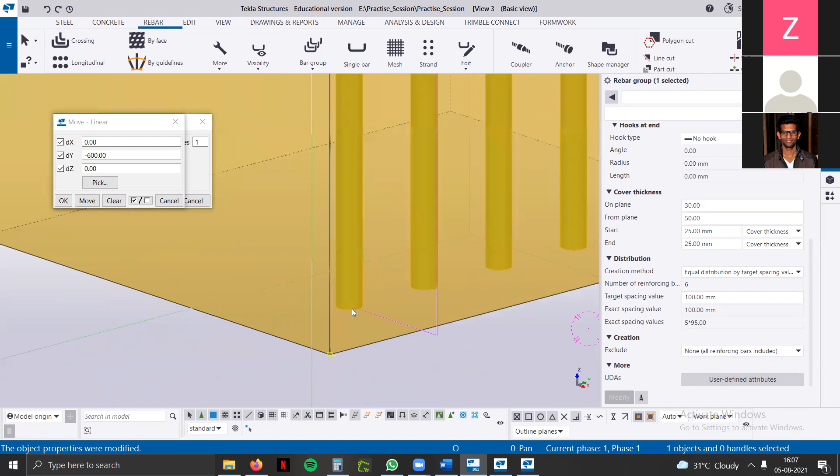Start and end, so start - it has given us a distance of 25, 25. What is basically is like cover from the start and cover from the end, from the top and the bottom, but we have the cover as it is.

So if we measure the distance as well, we can take a look at that. And why we are getting 62.5 - because from the center, 12.5 plus 50 millimeters, it is 62.5. Since we don't want that much, we'll give a cover of...

We maintain the same. And start and end will also give the same, 40, 40. And now we'll change the distance for that - we don't want to.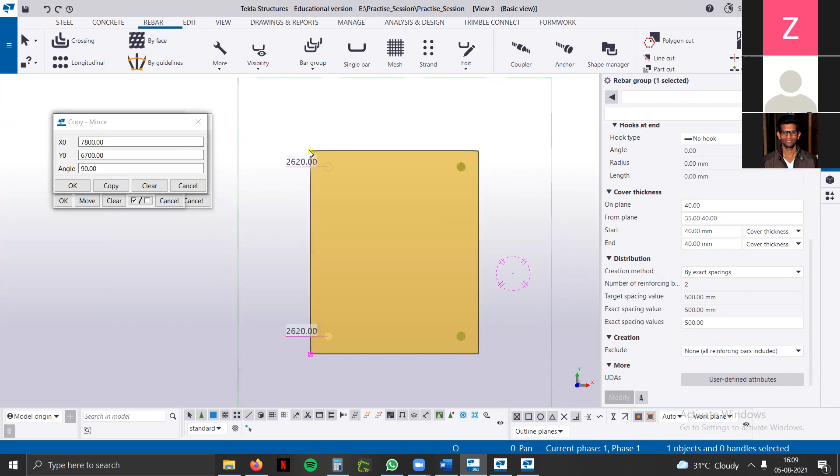We want it at the edge. So I have provided some distance over there, and similarly, without modeling it over there, we can just mirror these bars. Since I didn't copy this bar, it has directly modified to the move, so I will make it mirror. It automatically has taken the endpoints of that thing, and on the edge I have got it.

Now we want to have rings around the bars as well. So we'll add more bars at the center, this way. So we can add that bar as well. If we want to have the bar at the center, we'll provide it that way.

And if we want to have a ring, we'll just press the bar group, pick this column, pick the shape of the bar. Since we have used the vertical bars, similarly we can make a shape of the ring. We have to make it round, so we'll terminate out over there and there. Now the range from this point to this point, because we want it all over the column, so we'll use that.

Now you must be wondering why it is giving this thickness of rebar and not the proper one. So we have to make some changes, but before that, like the last default bar we used of 25 dia, it will be using that same thing. So we have to make some changes for the rings as well.

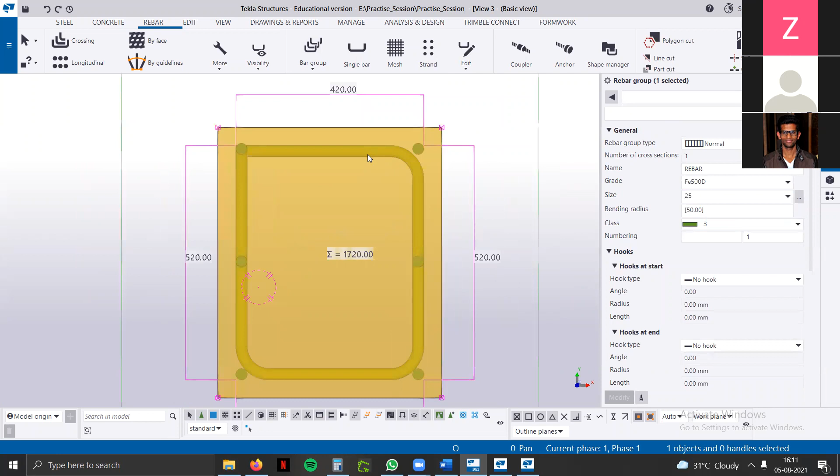So I'll pick up this and alter the size from here. I want specification like a 10 dia specification ring. We have an option in this rebar option, I'll use 10 dia for this. The bending radius had automatically changed, but since I hadn't modified it, the dia had not been changed. So now you can see there is a noticeable change over there.

And now I will change the cover for that as well. I'll make it 30, because 40 is for the inside bar - I need 30 for them.

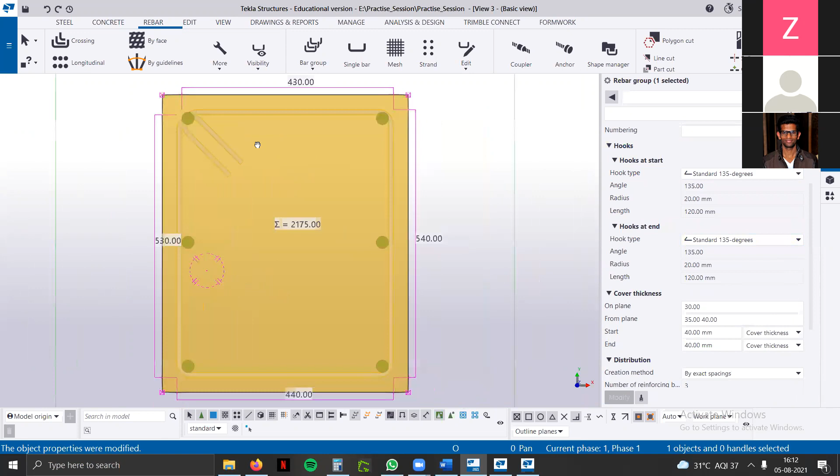And I need hooks as well for them, 135 degrees, one at one end and another at another end. So now we can see there is some overlapping over there. I can make it further more, or you can alter it that way, or you can move the bar from there.

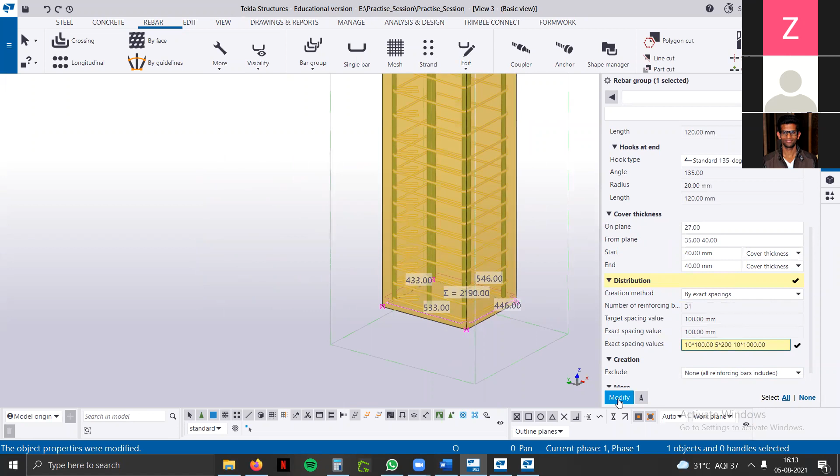Now we want to have that all in that thing, so we can space it up, like 10 at 100 spacing, 5 at 200 spacing, and 10 at 100. Because at the end we need to have closely spaced stirrups, and on the top, bottom, and middle we can increase the spacing as per the codes.

This is how we can reinforce our beam, footing, and everything. Any reinforced RCC member, we can model it and reinforce them. So yes, I had modeled that, and you can see it is being coordinated over there. That way I can have that reinforced.

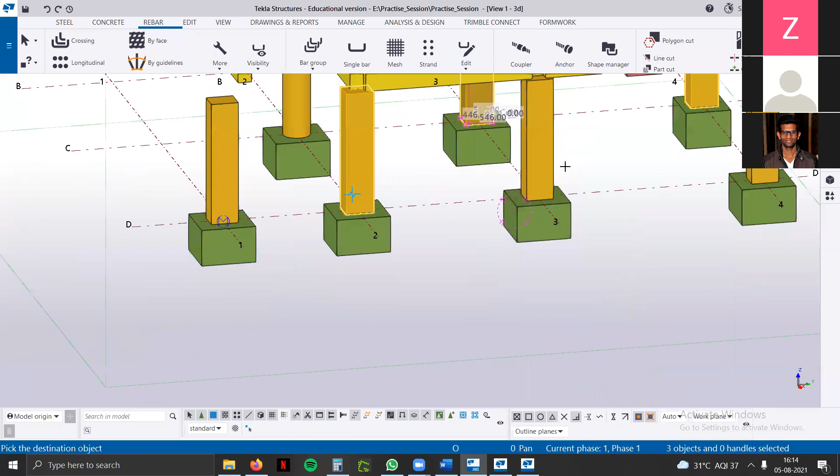But if all the members are the same, after modeling its geometry, I can simply copy all these bars using copy special, copy to another object. This way, this way, this way. So this is a powerful thing.

You can have all the changes done in the model, because the steps are: firstly we model the geometry, then we go for the rebar, and then we go for the drawings. I think that would be sufficient for now, because we can practice it and move forward after modeling these geometry elements.

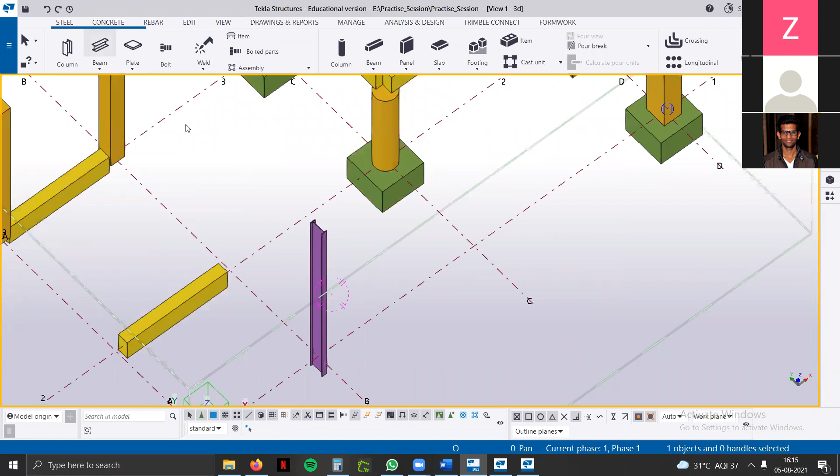If we can take a look at the column, we have an I-section for there. We have different profiles like ISMB, ranging from ISMB 100 to the 600 section. ISLB, if we want ISLB, it should be there. And ISJB, ISHB—as per Indian codes you want to have—and ISWB. These are the I-section profiles.

And if I connect one column to another column with a beam, we'll have some junctions and connections with them.

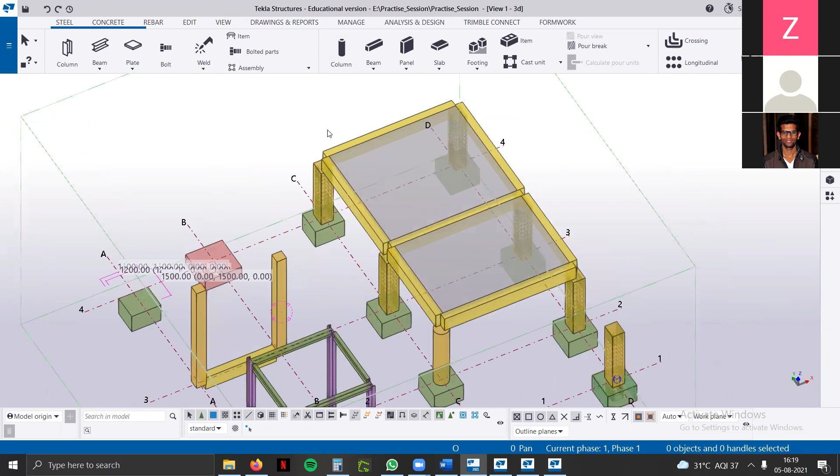Hello. Yes, Satyam? I think, sir, we can practice this—this geometry modeling is sufficient for now. Okay, okay, yeah, so it's fine, it's fine. We can do one thing—so you were doing on structures, na? So you have discussed all the aspects of Tekla Structures by showcasing this model, right? Yeah. Okay, okay, then it's fine.